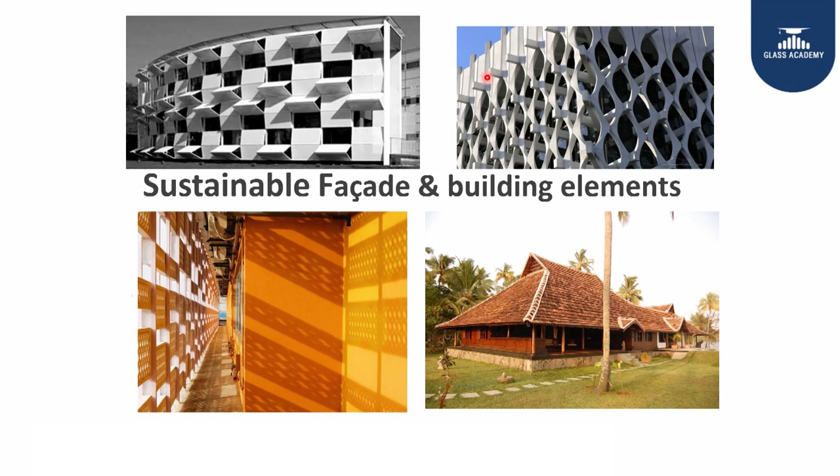It should be decoded and indigenized to the local climatic condition. This is how the facade should be designed to take care of your building operational energy and building occupant comfort. What is a sustainable facade? It can be defined as an exterior enclosure that uses the least possible amount of energy to maintain a comfortable environment for the building occupants without having any negative impact on the indoor environment, and the material you use for the building facade should have very minimal negative impact on the environment.

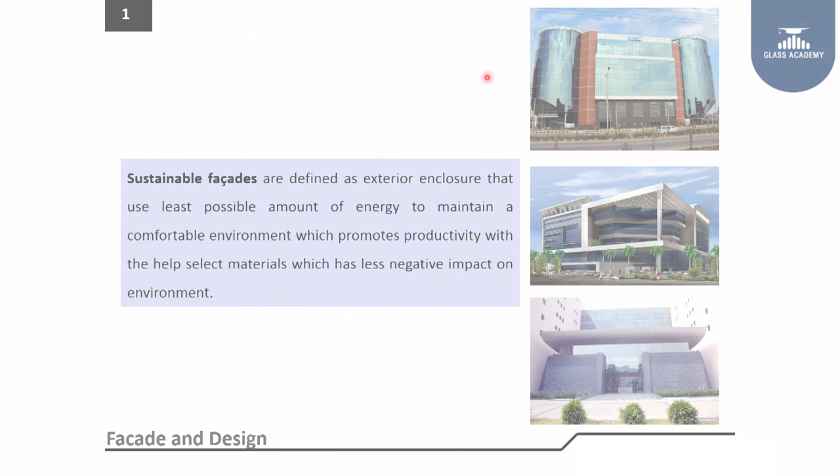So not only operational energy performance or building occupant comfort; the facade material should be eco-friendly and should have very minimal negative impact. You can't eliminate the effect on the environment because we are using virgin material, but you should know how to compare two materials and select the one which has very little negative impact on the environment.

When you look at why you need a proper facade for a building, why not just a building and leave it? It improves the building's aesthetic value. You can look at different buildings in different locations in this country. You get a wow factor when you see certain buildings from the exterior. In the early days we used to see the LIC building in Chennai, about 20-25 years back, a tall building with an elegant look. So that is also required. That's why the architect plays a major role in improving the aesthetic value of the building.

And also, due to the tropical climate in this country, the facade needs to minimize the heat gain to the building. When you minimize the heat gain, you will be saving energy during occupancy, and when you have a facade which gives comfort to the indoor environment, you can improve occupant comfort and productivity. Thereby the focus should be on energy.

How do you bring daylight to the interiors? How do you provide a view to the exterior environment? How do you minimize the glare to the occupant? Otherwise you have to put up blinds, cut down the daylight and the beauty of the aesthetics, and work in a dark environment with artificial lighting. It should be easy to maintain. You can't bring some element into the facade that brings a lot of difficulty for you to maintain.

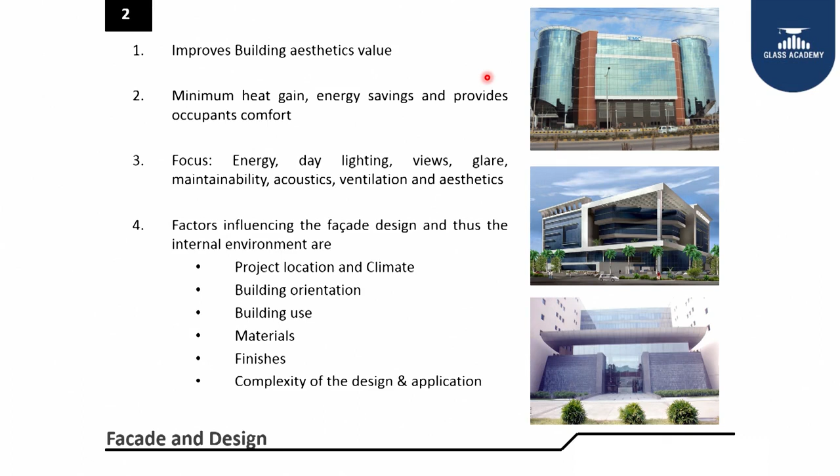So all these important factors should be mapped right at the beginning of the building design so that you can bring the proper facade to the building. It's like a person wearing clothes. So it is very essential for the facade engineers and all other system engineers to be part of it right from design, to ensure that the facade is properly conceived to get the maximum benefit out of it.

Let us talk one by one, like orientation, how the orientation has to be in India. For our warm climate, normally we get cool light on the north, and south can be managed easily. You can't have more exposed area in the east and west. If at all you have an opportunity on a site to orient your building, we normally go with a more north and south orientation and put less load on the east and west.

Even if we get some east and west areas to be protected, we can create some sort of space which can be utilized for services like a service core, lift and toilet facilities, which will act as a heat sink, so that the heat from the east and west in the morning and evening can be arrested to a large extent. So normally our exposed areas should be more north and south.

North will be a cool light. You can have more glazing to get that daylight penetration to the interior. South can be managed with some sort of facade design in terms of projection material.

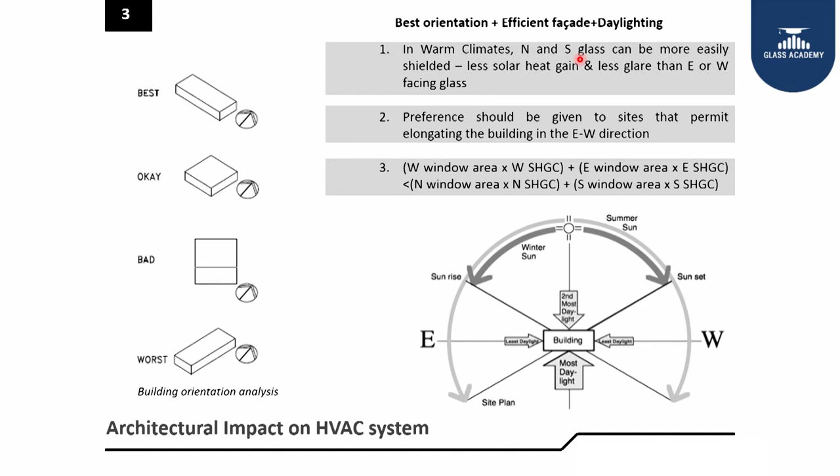Once you have an orientation, normally we have two standards we follow for the glass selection. One is the Energy Conservation Building Code of India, the latest 2017 standard, and the ASHRAE 2010 latest standard has come into the market. Both define the specification for our climate. ECBC divides India into 5 climatic zones, and ASHRAE defines 1.

But more or less, we are talking about an SHGC of 0.25 as a standard for India. From our study with 400-500 buildings, we need to target around 0.2 to 0.25 solar heat gain coefficient to optimize the heat ingress to the building and bring the optimum daylight.

So north, yes, though the standard says 0.25 SHGC, north you can still relax, go up to 0.5, 0.6, but there we are getting a cool light, and for the rest of the areas like east and west, preferably reduce it to 0.2 to maximize the benefit.

Also, you can have an overhang wherever required on the facade. You can look here, so that the projection angle can be optimized or designed based on the heat ingress and sun path study to get the sun angle hitting the bottom, not the glass. So the projection angle for the surja has to be designed so that the sun angle will never hit your glass. In that way, you can get the diffuse light to the interior, not the direct heat gain to the glass, which affects your indoor building performance.

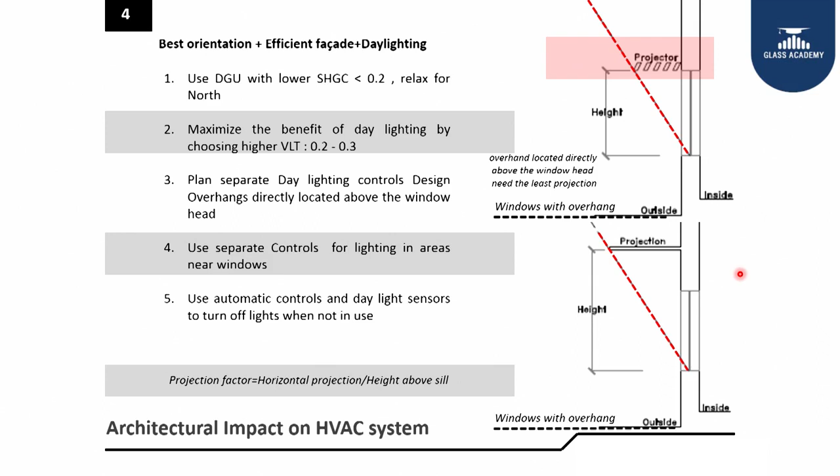This is the general approach for the facade design and projection or surja plus glass selection. You can see the projection angle. It will be smaller here since the window height is small, and when the window height is more, the projection angle has to be a little more, so that light will not hit the glass directly.

So particularly on the north side, you can go up to 0.45, even 0.5 sometimes, but the rest of the areas you can control. Predominantly you have to reduce it to 0.2, so that the light penetration can be optimized, and at the same time heat ingress can be minimized.

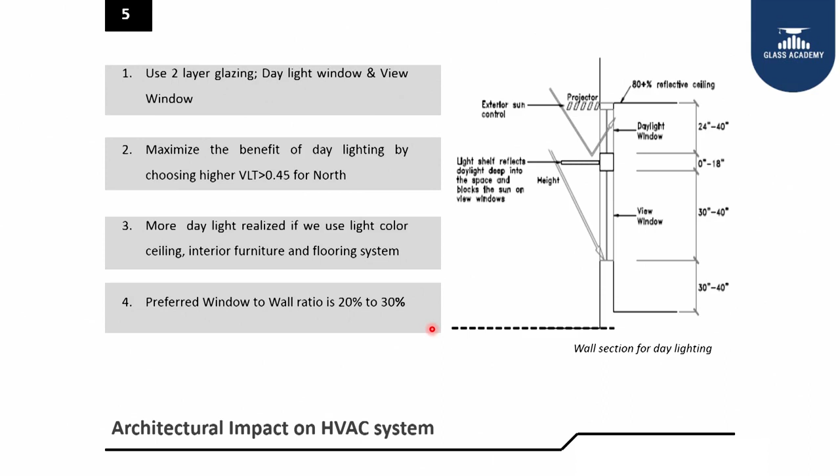So ultimately I look for a window to wall ratio of around 20-30%. That is the best number to be achieved for optimizing the heat gain to the building. So a 20-30% window to wall ratio is the best one to design for a building to optimize the heat gain.

Then when you talk about the U factor, there are three major factors we normally look at for a glass. One is U value, the second one is SHGC, and you can see here, this is the U value, then you have SHGC, and one more factor is visible light transmittance. All three are to be balanced to get the best out of the glass facade you have.

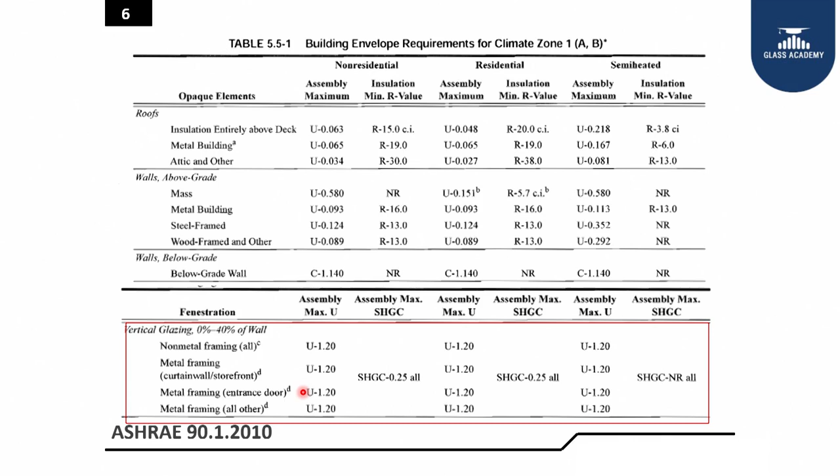Glass is very vital for a building wherein we need to get the view to the exterior and the daylight penetration. At the same time, how do you optimize heat ingress? So we normally go for lower SHGC, lower U value, higher VLT. That's how the combination is worked out for a building to optimize. This is from the ASHRAE 90.1 2010 standard. Even ECBC classifies the climatic zones: composite, hot and dry, warm, temperate and cold.

So these are the major 5 climatic zones, and the factors are defined here very clearly, what kind of glass needs to be selected for this building. The moment you have a facade design or the sarja has been designed, these values can be a composite value, including your projection factor plus glass. Together you can even relax a little bit on your glass to get the total performance of the building.

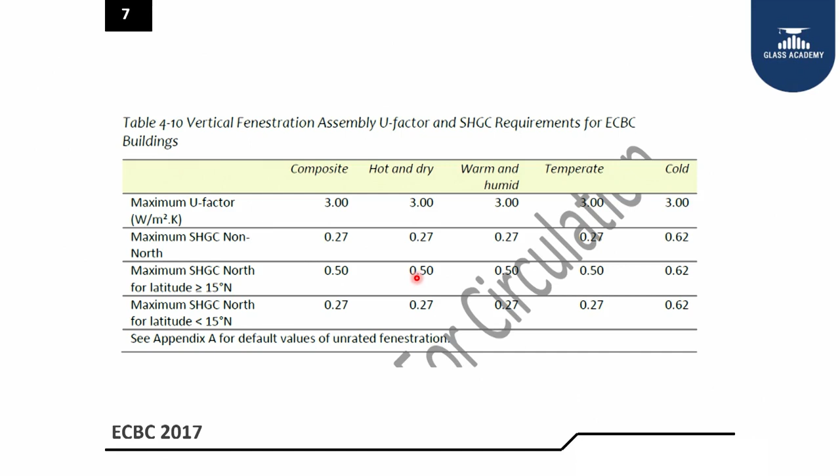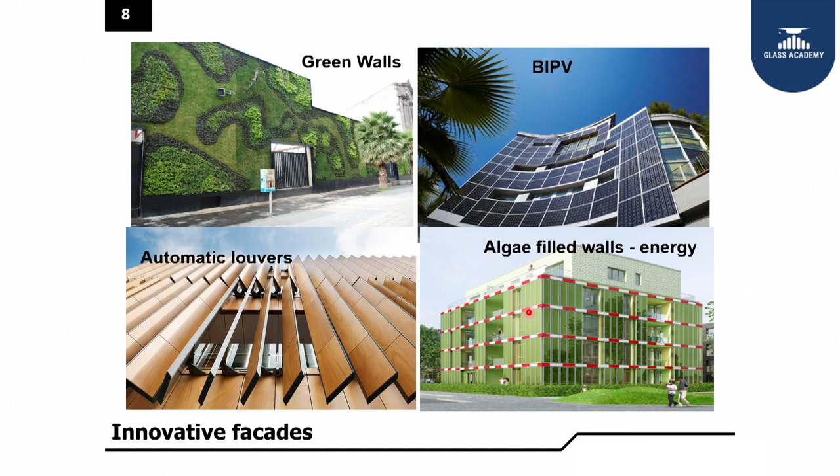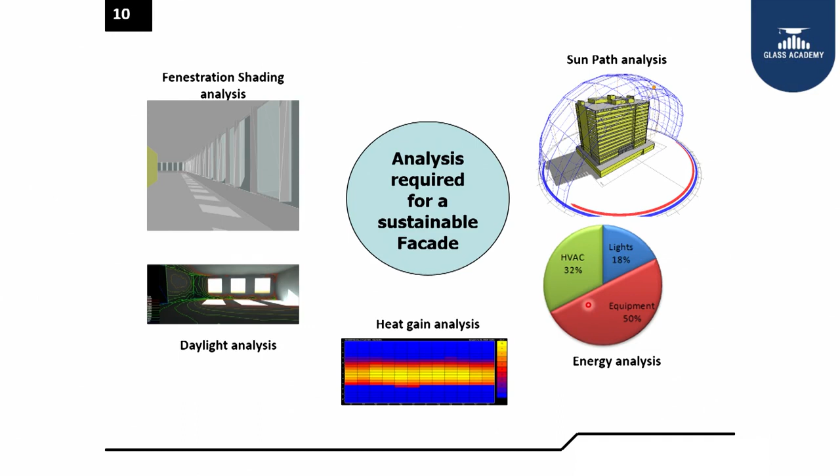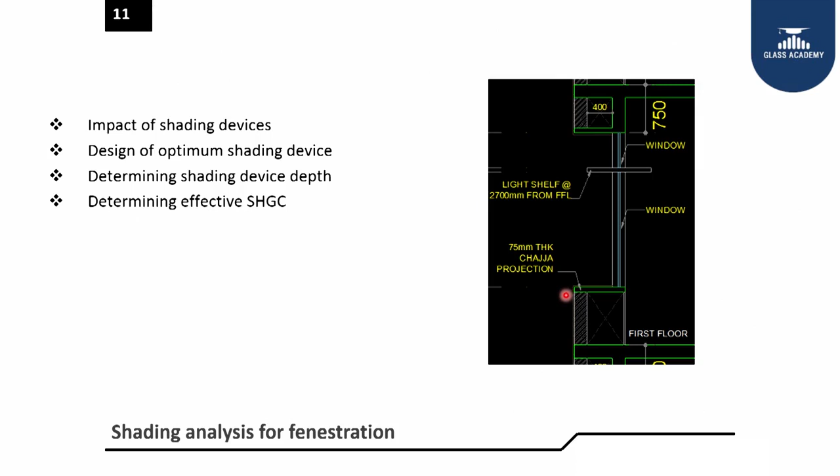And when you do the shading analysis, what does shading analysis bring onto the table for you to optimize your facade? Impact on shading devices, what kind of shading devices you have for the facade, and optimum shading. Can I go with a 600 mm sarja or 400 mm or 200 mm or 1000 mm? That will be decided based on the shading analysis. And how much is the depth, what will be the effective SHGC, and what will be the glass selection for a particular fin or sarja or projection device. So that overall impact has to be seen and implemented to not only save energy but also save on your investment.

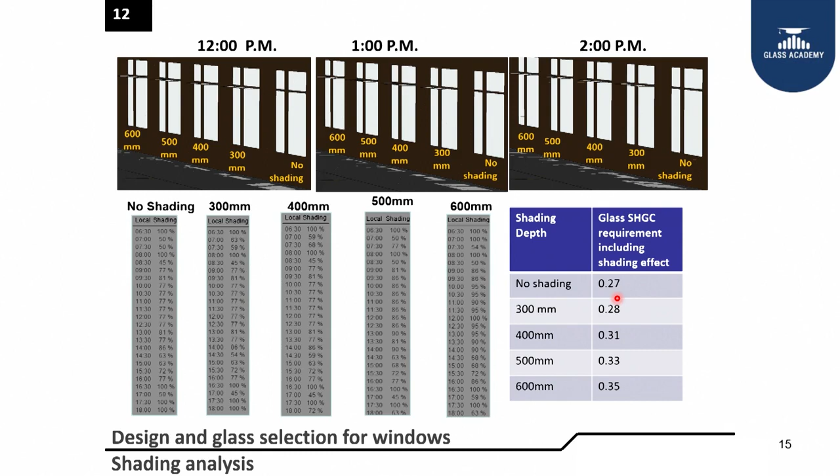When you have west, it's direct sunlight, 90-degree heating on your glass. So whatever fin you provide, you can't arrest this kind of sunlight penetration. It has to be vertical fins on the facade, and it should be a motorized or movable facade designed to cut down this heat gain or sunlight penetration beyond 3-4 PM.

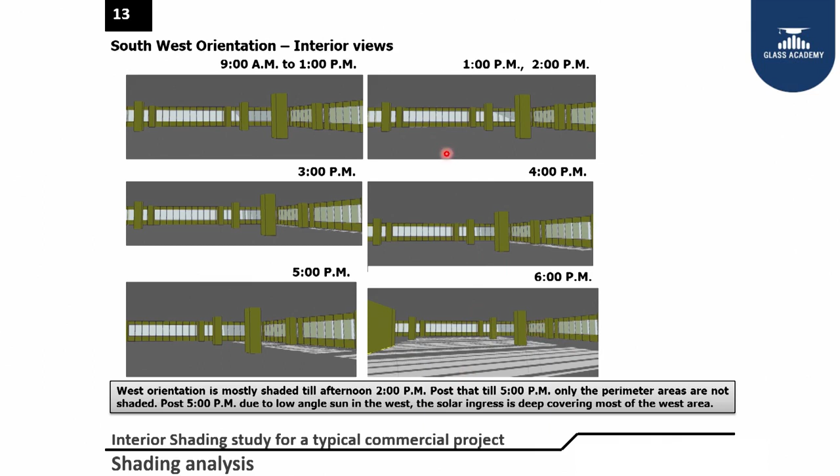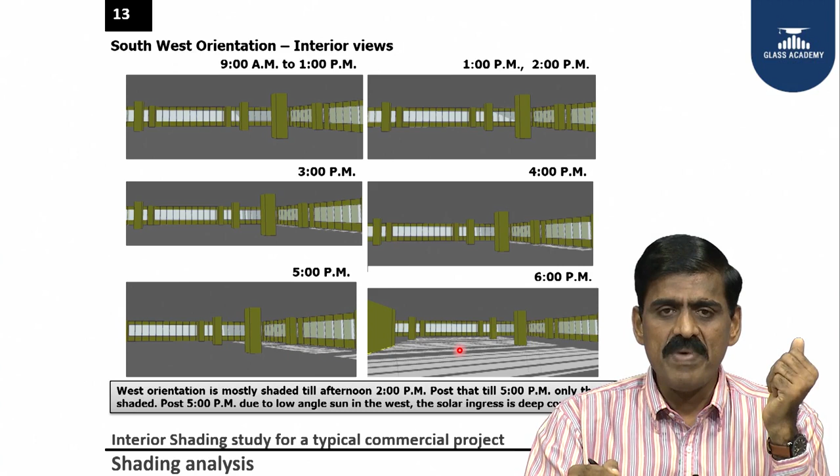So this gives an idea for you to understand how your facade and glass are really behaving in your building, and what kind of facade material you should have for different orientations to arrest the heat gain and also minimize the daylight penetration when excess daylight is coming into the building.

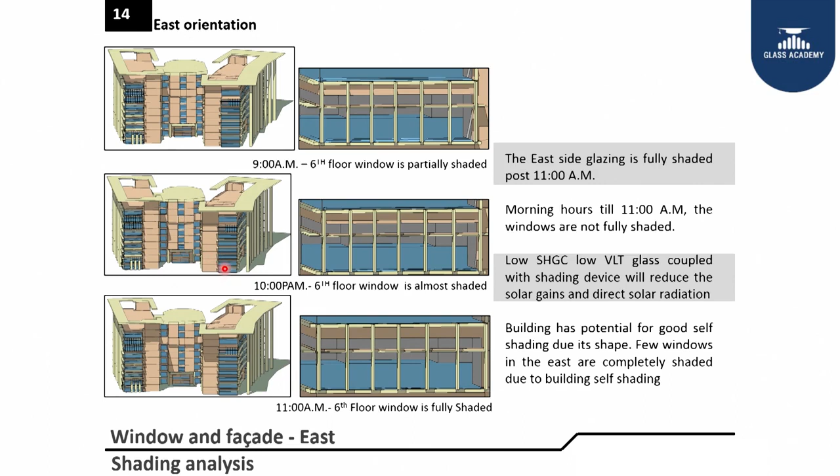So this building is protected; from this building, there is shading happening. So this glass is protected. Similarly, here it started happening. So self shading and overshadow from nearby buildings also have to be calculated, so that the facade design can be effectively implemented for the entire life of the building. So the self shading and overshadow also have to be seen in detail when you do the facade design.

So that's what I said in the beginning. South and north can have a more exposed area and you can have more glazing. South can be treated effectively with fins and chajjas. In west, you can't do it; after 4 it will hit directly on the glass. So minimize the opening on the west and east, and you can go more on south and north to effectively get daylight penetration.